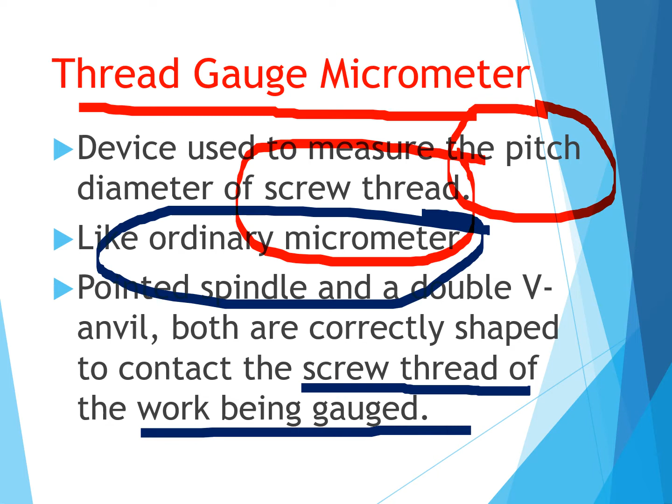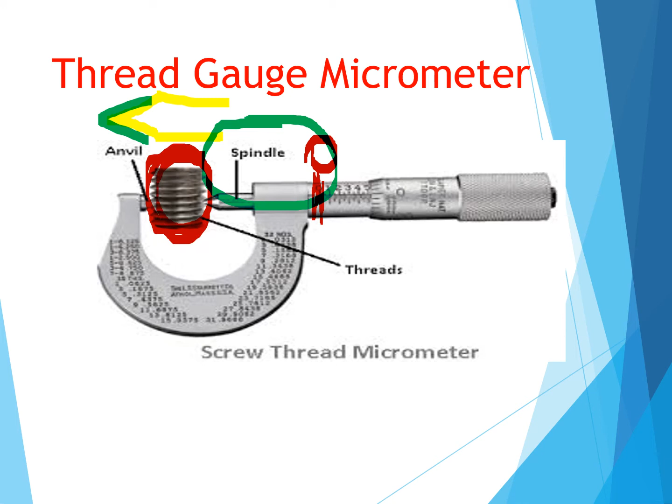The micrometer spindle is moved over the screw whose pitch diameter is to be measured. So when I want to measure the pitch diameter, I am going to move this micrometer. You can see here in the next slides. This is that V and the spindle, both are coinciding. It shows 0 on the main scale.

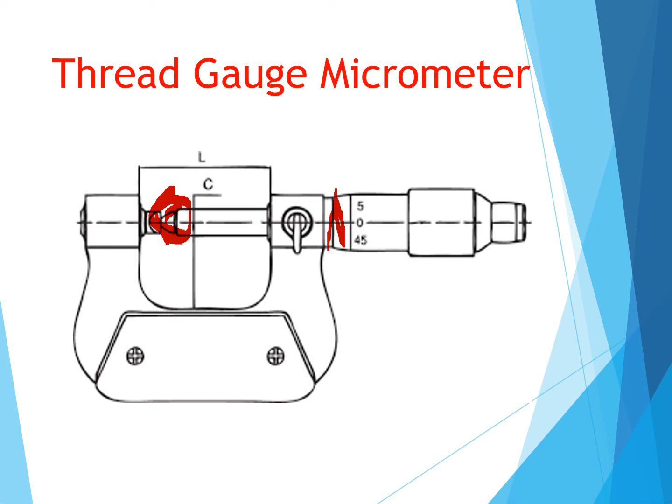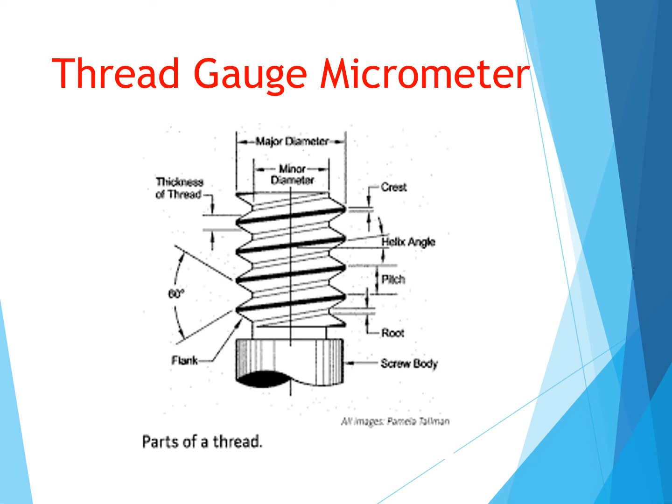The thread, you can see the pitch of the thread, the angle of the thread, the flank, the thickness of the thread, minor diameter, major diameter. Then we measure this diameter and take the readings. This thread gauge micrometer is used to measure the pitch diameter of the screw thread, whatever pitch diameter we want to measure.

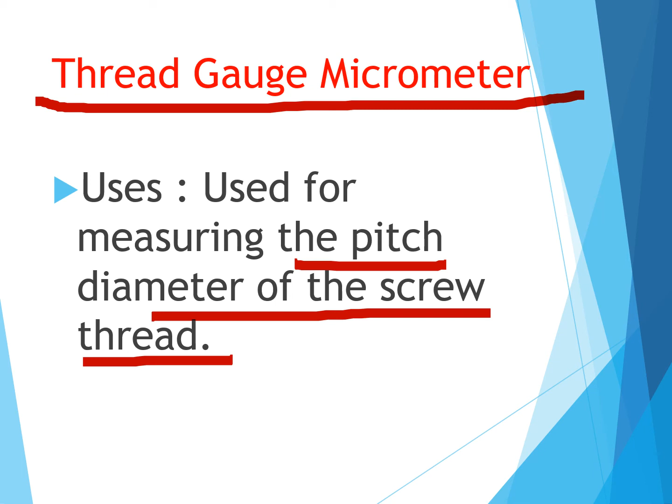The next is called the bench micrometer. So what is this bench micrometer? The bench micrometer is a linear measurement instrument, and it is best suited for thread measurements where the work must be brought to the gauge. So we are bringing this workpiece to the gauge where this bench micrometer is placed.

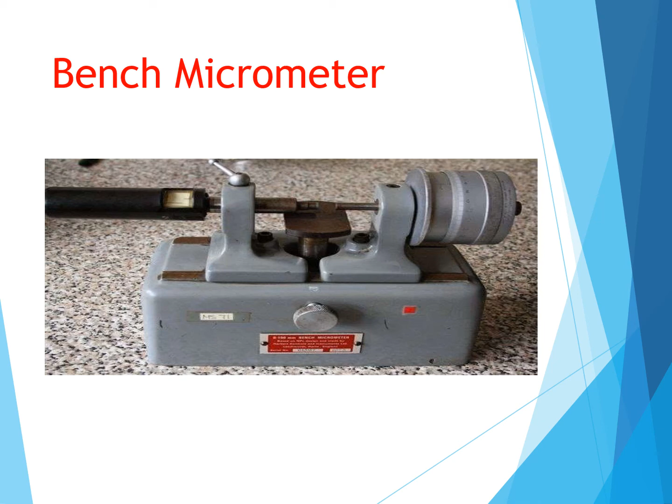Then you can use this micrometer to measure. Between these two holding centers, the standard cylinder is placed, and the measuring anvil is placed to note down the standard readings for calibration. Then we remove this standard cylinder and place the screw thread.

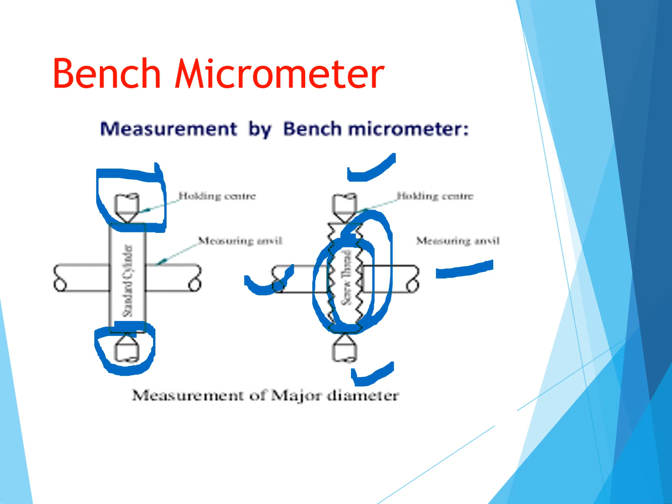This is a screw thread which is placed between the holding centers and the measuring anvils. These two are the measuring anvils and these two are the holding centers. It is placed in between, and then you can measure the dimensions of the screw thread.

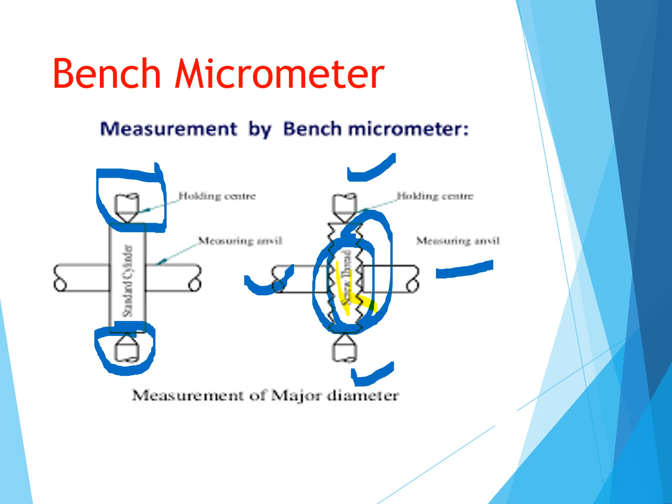So this is about the screw thread gauge and bench micrometer. In the next class we will take up angle measurement.